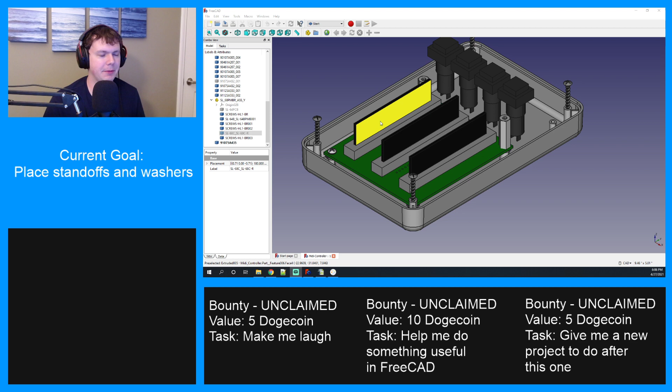All right, so last time we were designing all of this for a certain type of case, which as you can see here, let me pull up here. This is a good view. This is the case that I've just pulled in. Originally, oops, not that part. Where's the bottom? There it is. Originally, I was going to use this case, which was much shorter. And I was having a hard time making the buttons fit. Excuse me for a sec.

So we went online and looked at the company that I'm going to order these from, and they actually offered the same form factor. Let's see if I go here and zoom out, I can take this. Oops. Take that off, and then add this bottom piece in and take this one out. And you can see that nothing's really changed. So there's a case that already exists with the exact same form factor. It's just taller, which is good because it means that these buttons that we picked out can actually fit. You can see that they're actually quite a bit bigger than we had originally anticipated. But there's actually some space down here now. So I'm excited for that.

But what that does mean is we need to change the height of this PCB because these switches, which I have some here, have a set height. And we need to make sure that this plastic switch piece is obviously above the case so you can reach it. So we need to get the PCB at just the right height for that. And the way we're doing that is with washers and standoffs.

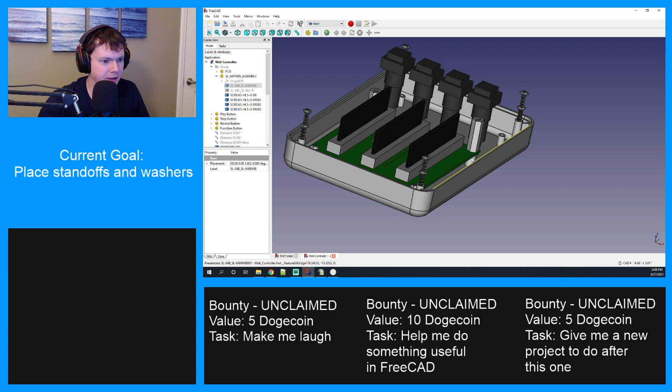So these standoffs here in the middle hold this side of the PCB in, and then on this side, and ignore the double stacked screws there. But if I turn the PCB off, yeah, okay, so you can see the washers here and then the screw where that mounting point is. So we need to make this taller because the case got taller. Which means redoing some measurements. So that's the first thing I'm going to get started on. And actually, I forgot to adjust that in our goal. So let me do that first.

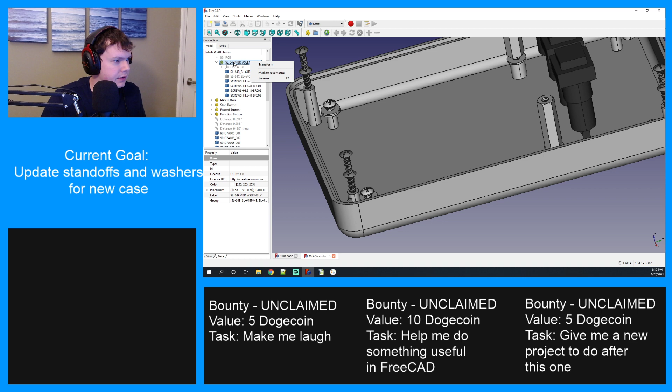So I think we are definitely going to go with this new case. So I don't see really any reason to keep the old one. The new one, let's see. Yeah, the bottom of the old one is in the same place as the new one. So I think this is fine to delete. So that'll delete a bunch of components. Yep, so that gets rid of our double screws and everything. But now we need to change our standoffs to match everything. And first things first, we got to figure out how high these switches need to be.

So if I grab this, here's the switch without the top on it. This height right here, you can see, is 15 millimeters. Sorry, I'm trying to block the mic when I do that. But yeah, this height right here is 15 millimeters. So we need to really get just the top piece, just a little bit above the case. The rest of it needs to be kind of hidden down inside. We want these switches to be low profile. However, we can't just go off that measurement because once the switch is on, that distance is actually a lot shorter. So I need to figure out what that is first.

So I'll measure it real quick. I guess I should measure in inches since everything else is done in inches. One of these days I'm going to find a way to buy only things from companies that are in metric, and that is going to be a good day. All right.

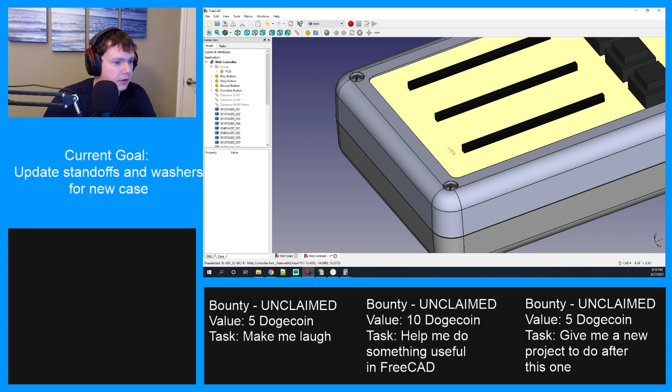All right, let's raise this. So we need to go up on the Z. Well, heck, let's just try 0. Already looking good. What does that put us at? There to there, 128 mils, and we said 194, right? Yep. So we subtract 128. 66. So we need to add 66 more. So 0.066. Okay. Let's delete this measurement.

All right, so this puts our PCB where it needs to be. Now you'll notice that it's sitting off of the standoffs a bit. So now we need to go take all of that into account. There is some math to be done here.

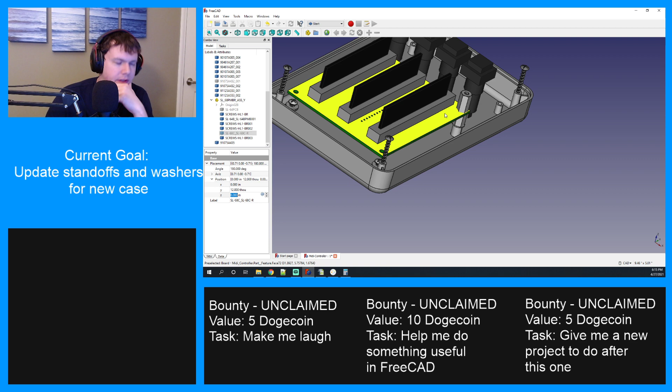Ooh. I apologize. I'm probably going to be coughing a lot tonight.

Okay. Let me go look up this new case that we've picked. Here's the website. By the way, these guys say that they can machine it and print it for you, so we might look into that option for this. Although I don't know how expensive it's going to be, or how long it'll take.

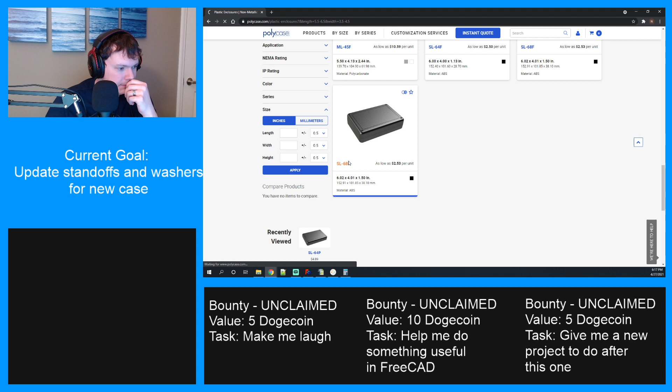Okay. It was SL something. I think I can do some filters. Length and width. 6, 4, apply. 6 by 4 by 1.5, I think this was it. Oh, you know what? It's probably marked in the part number here for the model. Yep, the 68P. Okay. So this one. And then I probably already have the drawing for it. Where is it? Oh, maybe not. Okay. We want this. Here we go.

All right, so this is the drawing that gives us the measurements on the inside. I'll move that out of the way. This will help us determine all these distances. Okay, so let's do this. First things first, I'm going to turn off that and turn the top of the case back on. And then I want to figure out these interior distances.

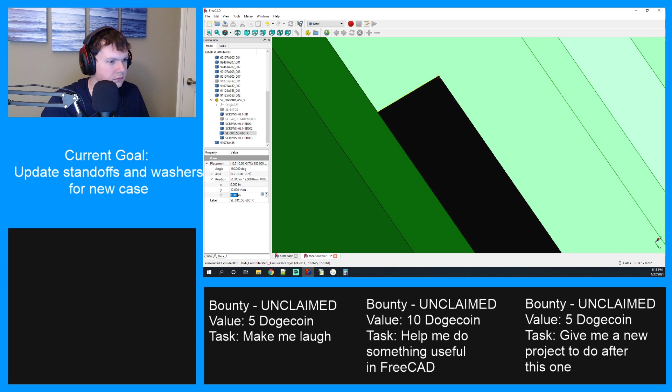I wonder if you can even do this. Oh, you can. That's cool. Oh, no. As soon as I move it, it doesn't work. All right, that's fine. I was just trying to figure out the inside distance to the bottom of the circuit board. We can do this from the drawing. We know that there's 194. Actually, let's double check that number. Yep, 0.194. Excellent. And then we need to add the thickness of this, and we take that away from the total length.

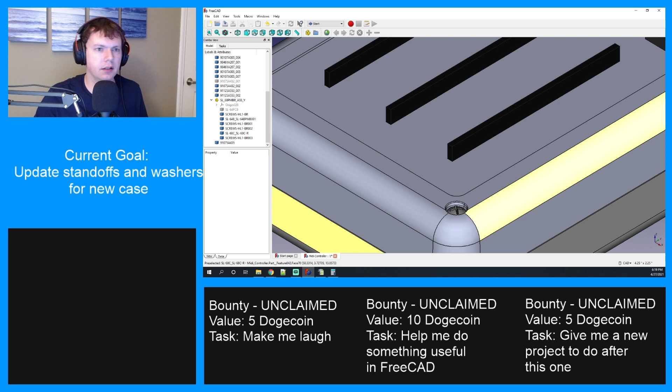All right. Let me pull the drawing up. The thickness of the top case, we want the recessed thickness. It's 0.110, but the recessed version is slightly different, 0.030. So in mils, 110 minus 30, 80. So it's 80 mils thick plus 194, so 274 mils. And then 15 millimeters was 591. Whoops, I just lost it all. Okay. 80 plus this, 274. Save that. And then 591 minus this value, 317 mils.

So take the top case off. 317 mils of this post is below the case. Now we need the thickness of this piece right here. Let me make sure this number is saved. Yep. From there to there, 0.254. So add that to the 317. 254 equals 571 mils, just over half an inch. So that is the distance from the top of the case down to the circuit board, which is what we're going to need for this standoff right here.

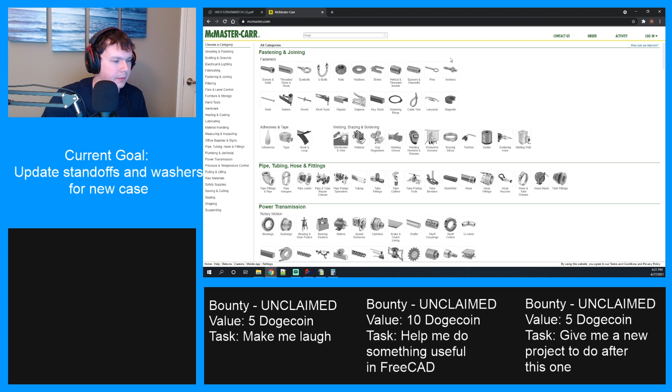What is this particular standoff? I've got McMaster up here. 9107, let me just pull in the other window. 5A435. Here it is. It is 7/8, so that's too big, we can't use that one. I guess we gotta find the closest. Everything on McMaster is done in fractional inches, so we need to find the one closest to 571 without going over. So it's going to be just over half an inch. We're using 4-40s.

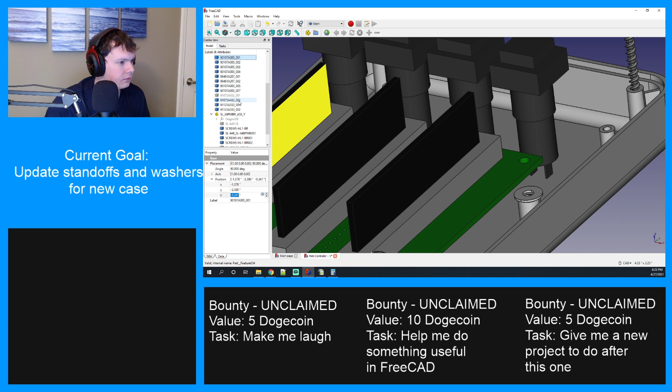9107, 5A103. There's no chance we've already included that, have we? Nope. Okay. All right, I'm going to delete this. And then we need to delete our other top standoffs probably. Yep, that one. Let's delete that and delete that. Just got to get rid of everything we don't need. Okay.

All right, and then this is the one that I'm tentatively using here. Actually, wait. 3/16 hex size. Can we go to a 1/4 inch hex size? Does that give us more options? Half inch, 5/8. No, it still gives us the same. Let's use the 1/4 inch size. I like that better. So this one.

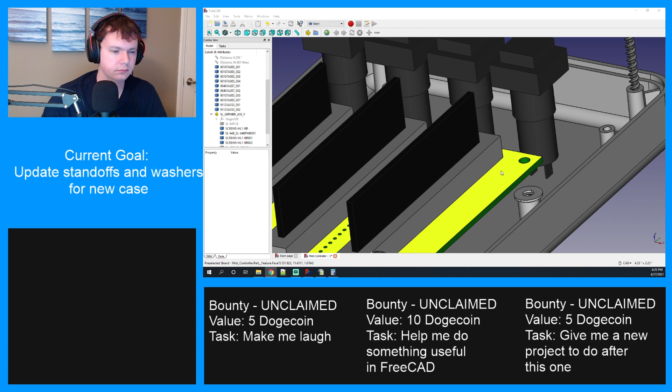Alright, so if I go back to this, I believe these are the 1/4 inch ones as well. Alright, doesn't look like we've used that, so I'm going to go ahead and download the CAD model. And then we need to import that. Alright, that ended up somewhere. Let's rename this. And then we need to duplicate it, because we need 2 of them. Okay. Now where is it? There it is.

So, alright, you know what? Actually, let's just start with this one because we're going to have to adjust some things. Axis, we need it on the Y. 0. Angle 90. Okay, that's a good start. You can see it's standing upright. Alright, now let's see, where is this part at, position-wise? 1.378 and 0.740. 1.378 and 0.740. There it is. Alright, so now we need to get it up high enough.

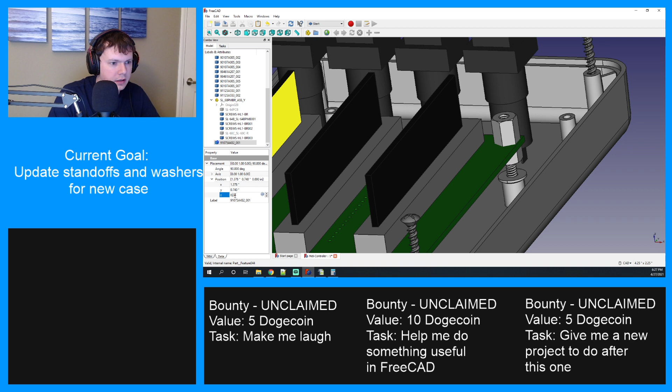Alright, Z-axis. Too high. 3, 2, 5. Alright, we're in the right vicinity. Let me get... There we go. We're gonna need this to be pretty close. There we go. 0.225. That's probably pretty close. Alright, so now we need to duplicate that. And then this one, the x-axis becomes negative. If we go back here, we can see that it's appeared over here. Right there. So now we got both of them. All right, excellent.

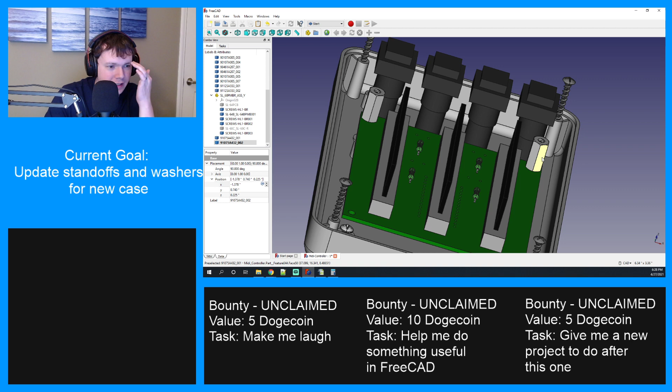You know what? Actually, this might be wrong. We decided that... excuse me. We had to use a smaller size. We used a 1/2 inch and it's 0.571. How thick are these washers? They're not super thick. I think we put a washer on here. Because we've left like 70 mils of space, which isn't a lot, but it could like clunk around. Yeah, they're 20. All right.

What is this part? 90107 A005. Actually, I probably have this in the BOM. Yep. Thickness can vary from 0.024 to 0.038. If it's 0.038, 2 of them is too much. But 0.024, 2 of them would be enough. Let's just start with 1. We can always add another if it becomes necessary. But yeah, I think this needs a washer on it. Unfortunately. So this gets raised by 0.024. So it becomes 0.249. 0.25, we'll round it out even, make sure everything fits.

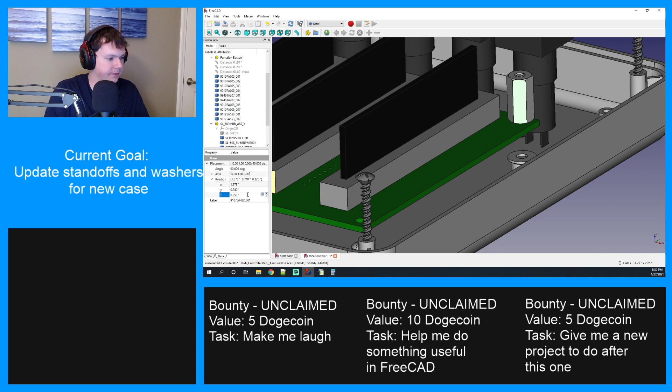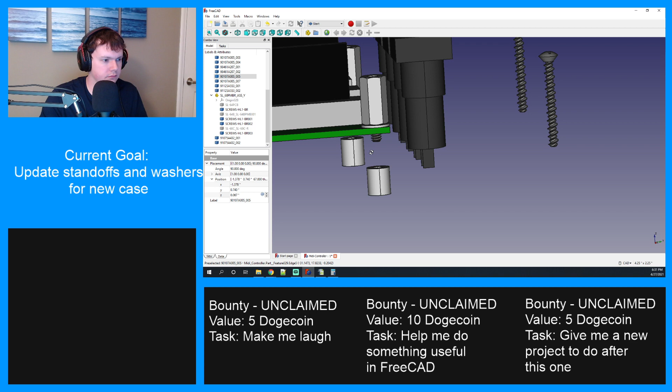This one too. All right. And then these washers need to go up to meet that. Let me get rid of the bottom case here, turn it off for this. Like that. 0 is right there. 105, 67, pretty close. There we go. That's the right height. All right, and we need to do that with the other one. .067. All right, excellent. We're getting there, kind of. Yeah, all right, so that works.

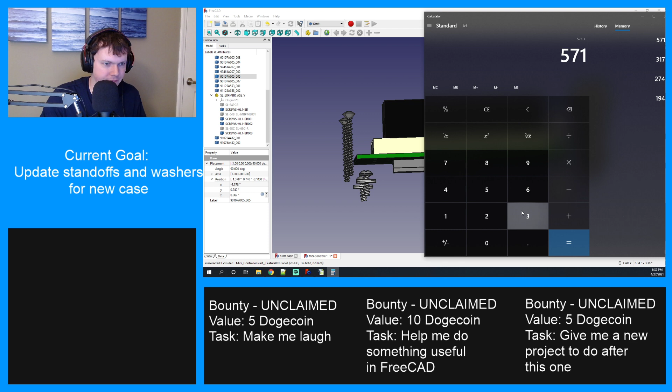Let me update the assembly with it. Whoops. Here we go. The middle top standoff becomes this new one. All right. Now we gotta do this one, the middle bottom. So we should be able to figure out the spacing required based off of this number. So we know 571 mils between the top of the case and the top of the PCB. The PCB is 62 mils thick. So we can add that. 633. So that's from the top of the case to the bottom of the PCB.

Now, if we pull up this drawing in particular, we should be able to see how thick the interior is. 1.286. Well, actually, probably need 1286 minus this number. Gives us 653. 653 is the distance from the bottom of the case to the bottom of the PCB. Or roughly 5/8, I believe. 5 divided by 8. 0.625, 653. Yeah, that's pretty close. We can actually do that without a washer. Okay. So we are going to pick a threaded standoff that is 0.625 or 5/8 long.

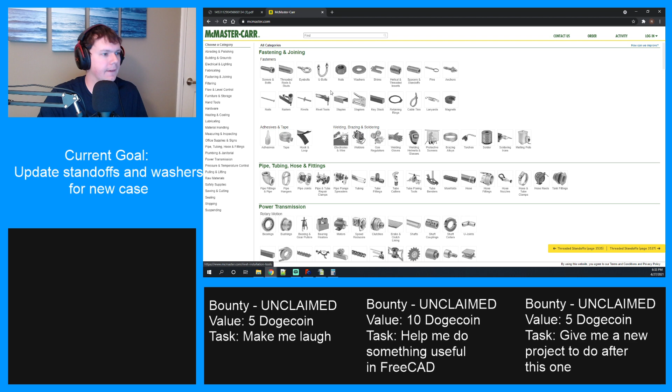So here we go. Let's go back to the home page here. And then spacers and standoffs. Round threaded standoffs. We want fully threaded, 5/8, probably a 1/4 inch in the outer diameter, and it needs to be 4-40. Oh, they have 9/16 as an option. Here we go. This one right here. $2.14 each. Jeez, these things are expensive.

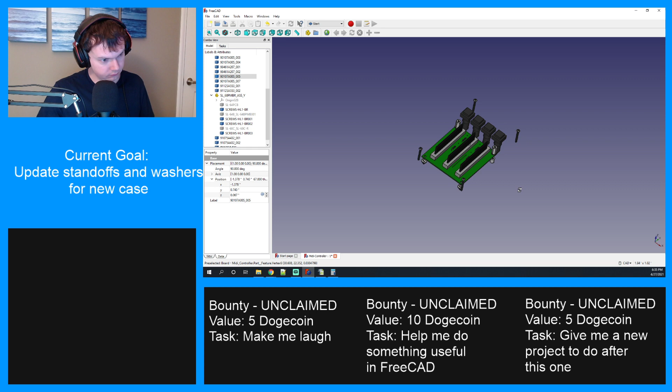All right, 5/8 long, fully threaded, 1/4 inch all the way around the outside. Inside is a 4-40 thread, so it'll tighten in just fine. All right, excellent. So let's add this to our model. Download this step file. And then we'll have to get rid of these ones. There he is. Hidden underneath there.

So 1.378, 0.74. There we go. And now we need to lower it down into the right height. So really, just until it's against the bottom of the PCB. Does anyone have any questions so far?

All right, I'm going to rename this real quick too. And then this one needs to get turned off. This one too. Okay. Oops. Negative 0. That's pretty close. Negative 0.32.

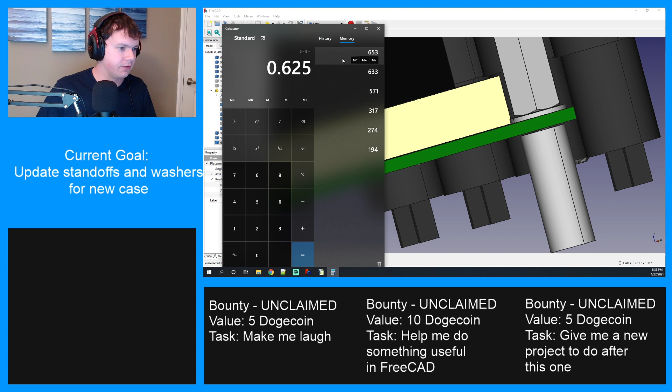I guess we could have worked that out because we could figure out the halfway distance of that total. If it's 653, you do this divided by 2, because these are set off the midpoint, so 326.5, that would be halfway between the board and the bottom, but 32 is fine. All right, let's duplicate that and do that on the other side. Change this one to negative.

And then we can delete these ones that we don't need anymore. And then finally we need to add this to our parts list in place of the existing one. There we go. Washers are good. So the last one is these standoff screws, and we'll probably have to add more standoffs. Well, we're going to end up buying a lot of stuff for this. It's going to get expensive.

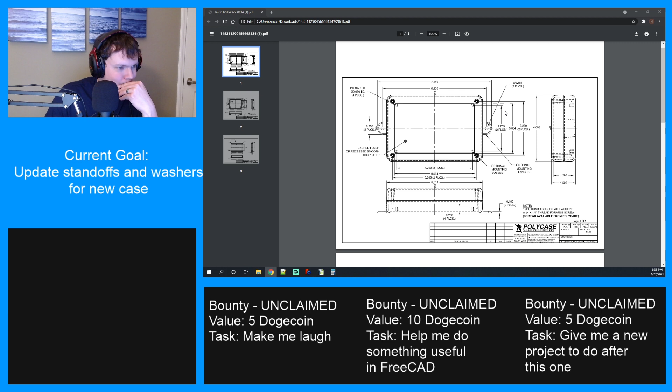Okay. So these screws got to change because they're not going to be long enough. And then we need something in between here. We might be able to get rid of these washers, or more likely just have to move them. We got to get the distance from the bottom of the PCB to the standoff. That'll be a good start. So how tall are the mounting points? 0.25 inches. So distance from the bottom of the PCB to the bottom of the case.

Minus 250. Gives us 403. What is the closest fraction to that? Let's start with the standoff. So 0.403. For this one, I'm not going to use a threaded standoff. Let's back up here. Instead of a standoff, we're going to use what's called a spacer. The only difference being spacers are not threaded.

Aluminum unthreaded spacers. These are pretty cheap. All right. We want 1/4 inch diameter for number 4 screw. That inner diameter is a little too small. Maybe a number 6. Yeah, probably number 6.

And then what's the closest fraction to 0.4? What's 5/16? This is where I need a chart. Maybe there is one. I can just Google real quick. Fractions to mils. I just want a table. Here we go. I don't know if I can show this on screen because copyright stuff. So we need as close to 403 as we can get without going over.

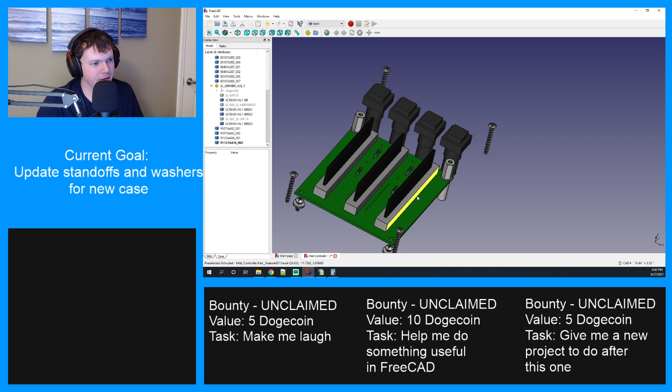So do we risk the bigger standoff, or do we risk going with a machine screw? The problem with a machine screw is sometimes in plastic, especially because they don't cut very well, they can get kind of jammed in there, and I've actually had them snap before, depending on which one you use, when you're trying to pull them out. If we make this really tight, it should be fine. Yeah. Any thoughts on that? Anybody?

Let me look at machine screw. Just give me a standard. 4-40. I guess we just pick any of these. Yeah, 0.112. It's much thinner. What's the diameter of the hole on this case? Because that'll matter too. Interior diameter is 0.090. Okay.

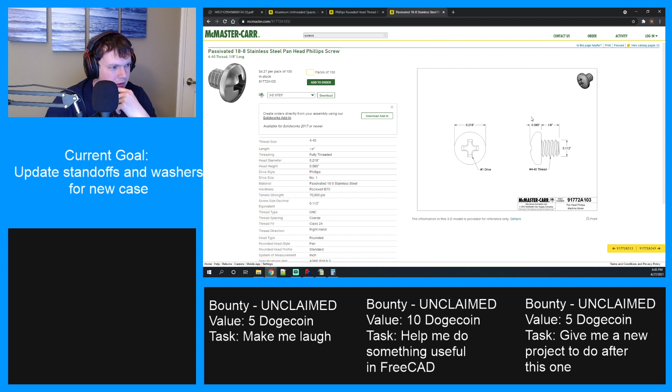And the screw would probably go in just fine, but I don't know. Maybe this is the right option. Maybe we go with a 4-40 and go with that. I think we do. I think that's the safer bet. All right, let's do that then. I'm not hearing anything otherwise, so. All right.

So it's like 1/4 inch diameter, number 4. What size were we looking at? I forgot already. 3/8. That's right. 3/8 number 4 for this one. All right, we'll download this one. And then we need to add that in here. And I think we're going to have to have one washer as well. All right, it's hidden in here somewhere. Yep, there it is. So 0.378 negative 2.380.

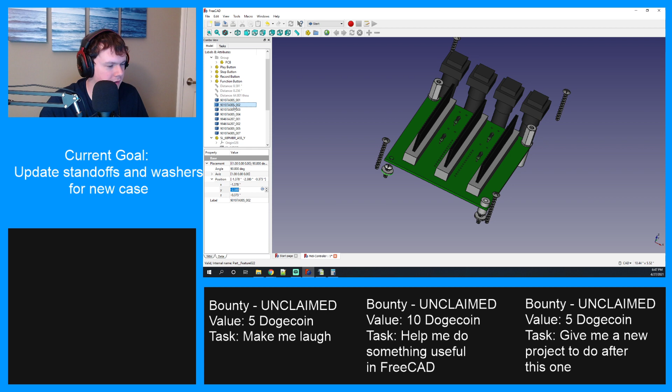All right, what was the screw again? Negative 2.38. And then we will adjust this. All right, excellent. And then I am going to turn off a lot of this stuff so I can line this up. There we go. And we need to adjust the height. We could probably figure out the distance, honestly. That's all right, though. Just go for it. It's more fun that way. Oops. 1. That's probably close enough. 0.19.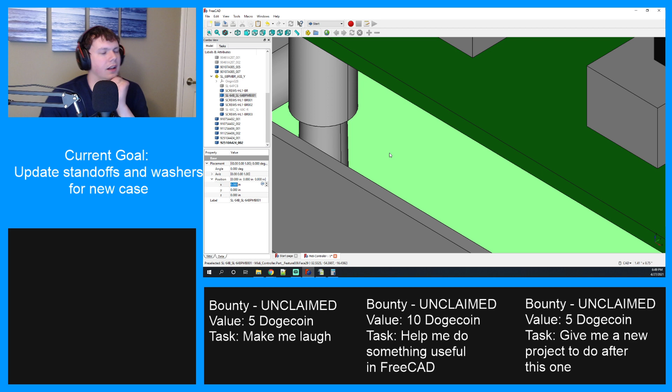All right. And then we will duplicate that. And we need to change the X to negative. Ah, we're getting so close, man. All right. So that should be fine. And then if we pull in the bottom case, I think that's that. Yep. Did we get that right? It looks like it. Question is, how much space is there in here? There's going to be some at least. But I can't see it very well. I don't know how to do that. I need to do some sort of cross-section view or something.

Okay. Oh, yeah, you can see quite a bit of space in there. Yep. I think we'll be okay to add a washer. I think we should. Right on the bottom of this. So, all right, let me turn this off. And let's see, let's lower this by 0.024. So negative 214. And then we should be able to raise the washer to be right in that space there.

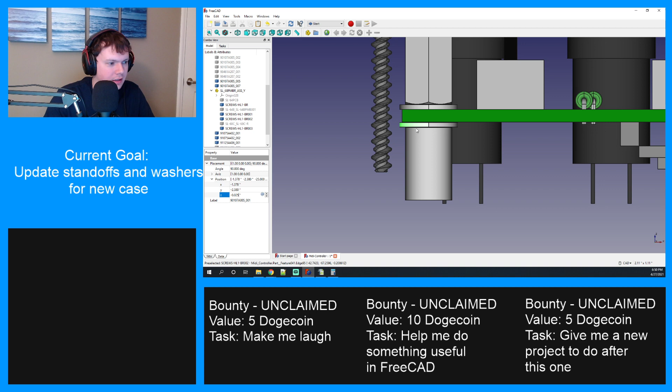Turn this one off. There we go. Oh. All right. It's going to be a very small amount of movement. Yeah, right there. 0.025. Fits in that space perfectly. All right. I don't think we'll need another washer. Let me turn on this again. And then, yeah, I think it's okay, but I think we're good. All right, so now I need to do that to the other side.

Let's see, where do I want to bring this washer from? Yeah, I'm gonna delete these two. And then change this one to a positive X. I guess I could turn it on to see what is actually happening. All right, and then minus 0.025, so we'll adjust that to the same here. Okay. Excellent. And then I need to make sure we update.

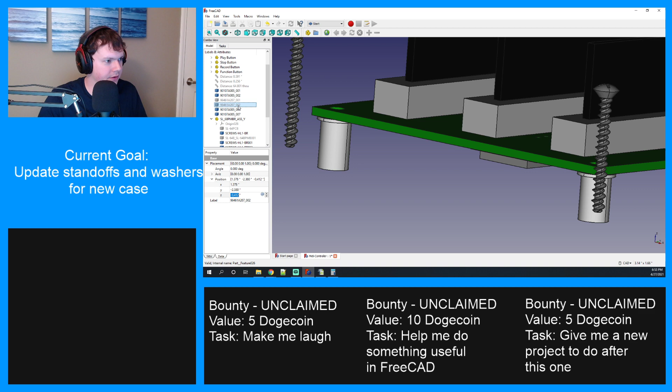So that's almost everything. The last thing I think is the screws, right? Yep. And so we need different screws, ones that will actually go down into the case. Let's see if our case drawing here tells us how far down that hole goes. It's probably the whole 0.25, honestly. But I don't think it tells me.

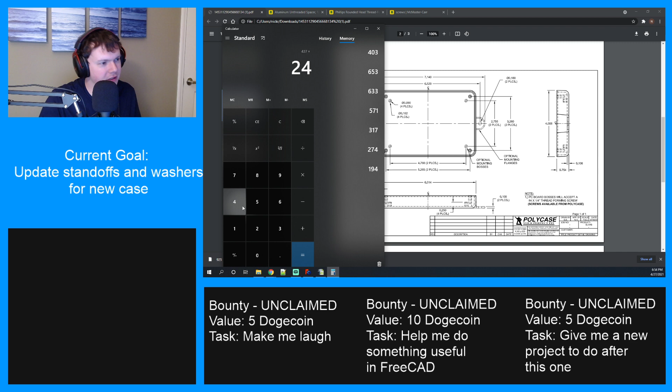All right, well, we'll have to figure that out then. So, good screw size. Let's see. Store that number just in case I need it. So we need mils. We need 62 for the thickness of the board, plus 3/8, which is 375, plus the thickness of the washer, which is at least 24. So we need something that's at least that, the 461. Plus a little extra to actually get to.

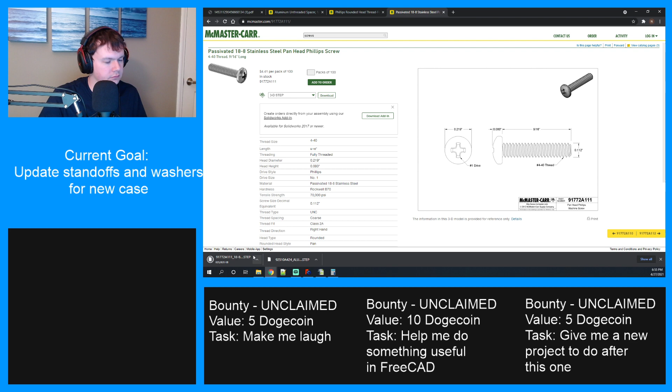What's the next size up from half-inch? 9/16. Oh, that's not 4-40. Yep, 9/16. What is 9/16 in mils? .5625. That's probably better. We should probably do that. Let's go with a 9/16. All right, so this will be good. We can just do something. What is this? Oh, that's that standoff back there. That's probably fine to leave on now.

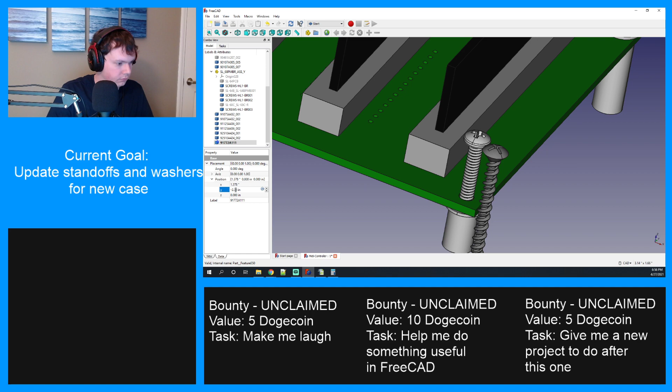I'm gonna delete these extra distances. All right, we need to import that. Where is it? There it is. Oh, it's already in the right orientation. Look at that. All right, 1.378, negative 2.38. Okay, there it is lined up. Clearance looks good. It's good on this side as well. Yep, it's really close, but it's right where it needs to be. Oh yeah, because that's the hole anyway, so. All right.

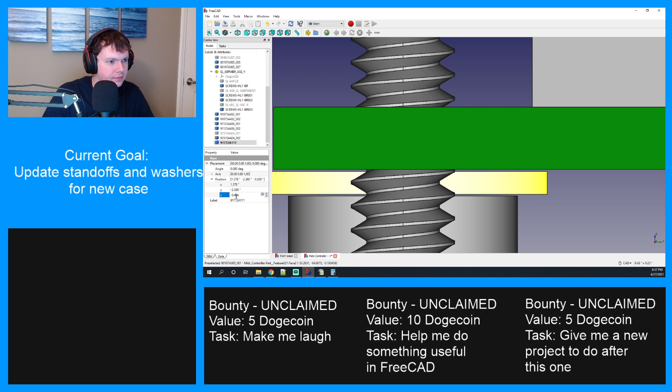Actually, this one is probably the best view. And then we need to move this down. Wow, honestly, that half inch was pretty dang close. Let's go for 7, 8, 9, 5. Yeah, negative 495. Okay. So then we should be able to see. Sorry. If I turn these back on.

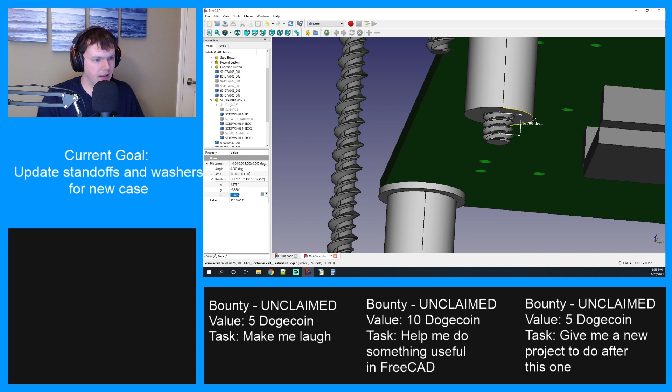Does the height of that seem weird to you? Anyone? It's like there's no clearance for the washer on that one. Where's the washer? Oh yeah, there is no clearance. These are different heights. 214, yep. 4. Okay. Let's see what kind of height we have on this. From here to here, 75 thousandths. We honestly could go a little bit bigger on the screw. That should be enough to grip into the plastic, but it may not be very much. I think we'll be okay though.

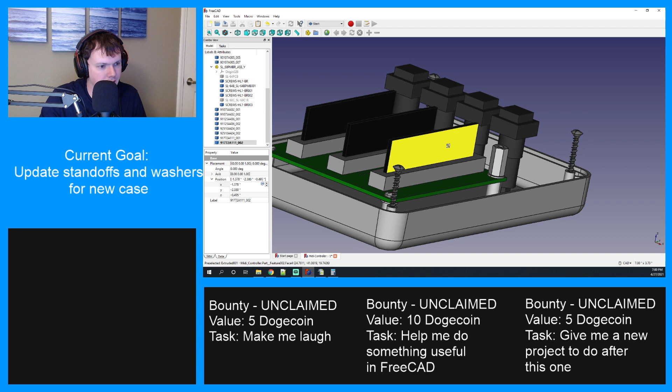Yeah, hard to see. All right, so we need to edit this. And then we need to duplicate the screw to the other side. And then I think we'll have all of our standoffs and screws done. There it is. All right, so look at that. The whole assembly, minus the top shell, obviously, is all there. Whew. All right, well, that's cool. So we have a solution for all of that, really. And what we'll do is we'll put some adhesive pads on the top and bottom of these standoffs, and that'll kind of squeeze everything into place. And I think that'll be good. All right, cool. So that's looking really good.

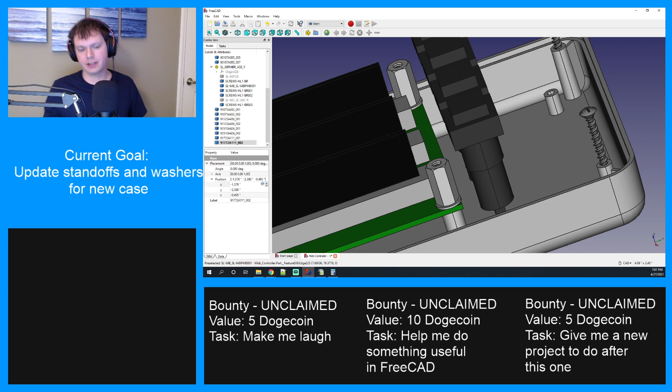So now we need to do... Actually, first we need to add these screws to our materials list. Here. All right, let's do those ones. Slider knobs, label and stickers, or feet, buttons. All right, this one, the cable. This is the next thing we need to model. And it is kind of annoying. So part of the other problem we're dealing with is we have to fit a cable in here, a cable mount, and it's a pretty big one, so I'm a little unsure of how exactly we're going to do that. All right, so this is the one I was looking at using because it's not too expensive, and it switches it from a USB-C to a USB micro, which was requested.

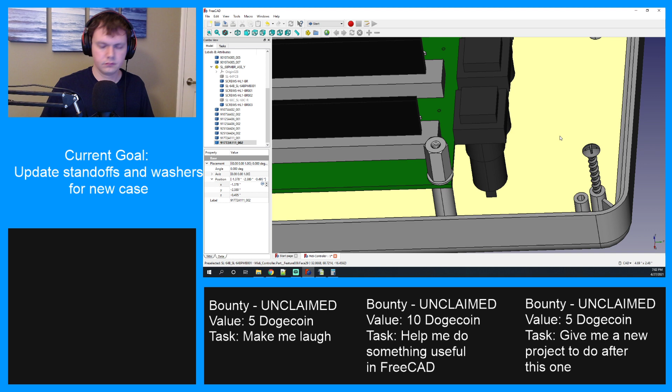All right, here we go. So the downside being how long it was. This is in millimeters. 40.5 millimeters. Which, that's a lot. 40.5 millimeters to inches. What is that? 1.59 inches. So over an inch and a half. And from here to here, that's not that long. This is not even going to be close to correct, but as a rough estimate, 1.665. Okay, so unfortunately, that's a heavy angle. Yeah, so that's not really a useful measurement at all. So if we go from like here to here, yeah, 1.407. So it's already obvious that it's going to be too big.

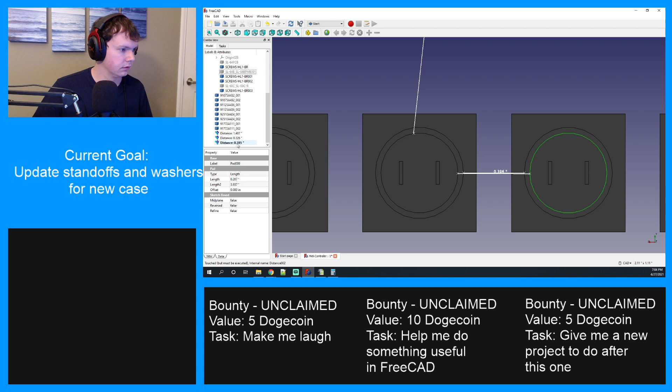And unfortunately, the gap between these buttons is not big enough. Let's see, from here to here, 0.326. From here to here, 0.385. The 0.385 is probably what we'd work with. This is 13 millimeters thick, which I think is close to half an inch. So that doesn't quite work. Yeah, 0.5 inches.

Although, it does get thinner right at the end here. Down to maybe like 9. What's that? 0.35, 0.38. That could slide in there. It's going to be dang close, but it might actually fit now that I'm thinking about it. It depends on how long this section is. If there was a model for this, that would be awesome, but I don't think there is. It is an Adafruit thing, though, I think. Yep. 4056.

Yeah, they don't have any kind of model.

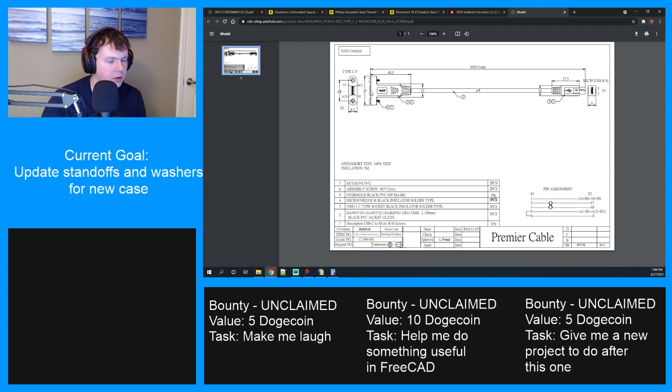Okay. Does their drawing show that this piece sticks out? It does, but it doesn't tell you how much. It shows that the USB-C port sticks out a bit, which is something we need because we're cutting through the edge of that case, but I don't know how far it sticks out. Right. Well, I think we model it and try it and see what happens, and go from there.

All right, so I think we got to update our goal here for this one. Oops. Model the USB-C port. Okay. I probably should center that a little bit. There we go.

No one's attempted to claim a bounty tonight. I'm kind of surprised.

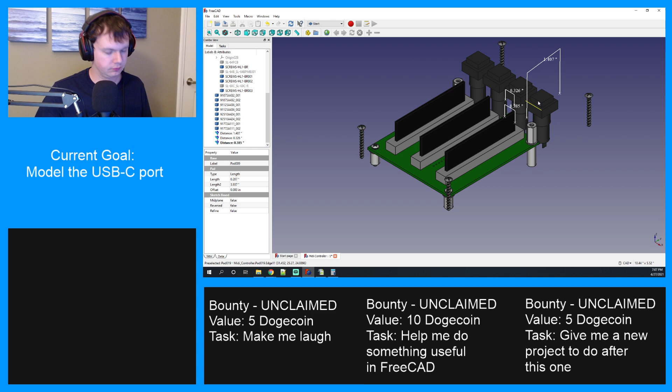All right. Oops. All right, let's model this part and go from there. I think I'm just going to model it kind of looking down. So let me turn a lot of this off. Create a new sketch. I think we want XY. Okay, yep, want it down here, and then I want this off. That's an odd origin. I thought the origin was supposed to be in the middle for most of this stuff. All right, well, we'll go off the origin.

I think I need to change our units here. Edit. Preferences. Units. Apply. Okay. And then I'm going to turn off these screws. Just turn all this off, honestly. Okay.

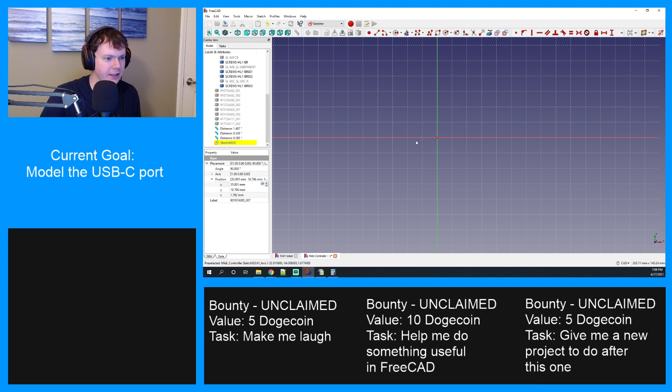So I'm going off this drawing right here. So we need to go off the end of this. We know it's 28 millimeters wide and 8.5 millimeters thick. So we're just going to make a square like this. We're not going to make a perfect model, just a rudimentary one to kind of get us started. So let's do a rectangle. And then we'll start adding in constraints. All right, so this needs to be 28 millimeters. And this one needs to be 8.5.

And then a vertical constraint from, it already has a horizontal constraint. Shoot. How do I do this again? Nope. From here. Nope. How do I constrain it? I need to center it, basically.

How's everybody's Tuesday going? Anything to report?

I need a constraint between a point and a line. I thought there was an item for that. That's not it. Oh, I did this last time, and I can't remember how to do it.

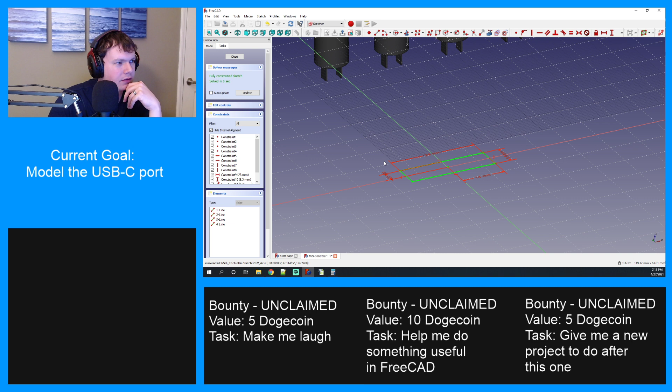Line drawing inspection. It's not draft. I don't think so. No, that's definitely not it. All right, go back to the sketcher. Sketch. I've done that. I need to retain information better. 3D view or model view? I don't remember which one of these benches it is, though.

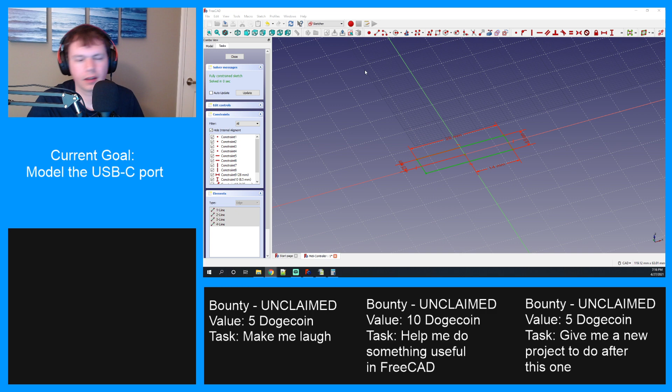Oh, okay, so hold on. Go here, select the sketch in the tree view, and then pad in the part design. Here we go. There it is, this one. It's not highlighted though. I may not have done this the right way. I might have to delete this sketch and try again, because I might have done it in the wrong thing.

Delete, please. I want to delete it. There, I'll just get rid of it completely. Oh, you know what? I probably didn't have that closed the whole time, which might be why that didn't work. Hold on. I'll redo everything. Hit close. And now if I go to part design. Ah, now we can. I didn't have the sketch closed. Okay, interesting.

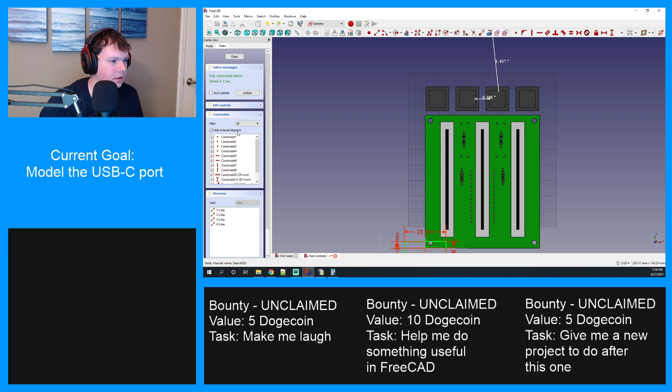Alright, so part design. Is this what I wanted? Hold on, something's still not working right. "In order to use part design, you must need an active body object in the document. Please make one active or create one. If you have a legacy document part of the body, use the transfer function into a body." Okay. This is really what I get for not paying attention.

Okay. Create new part and make it active. So we need a body. And then for this body, we're going to add the sketch in here. And extrude that. There we go. Aha. Okay, we got there in the end. Now I can go back to my drawing.

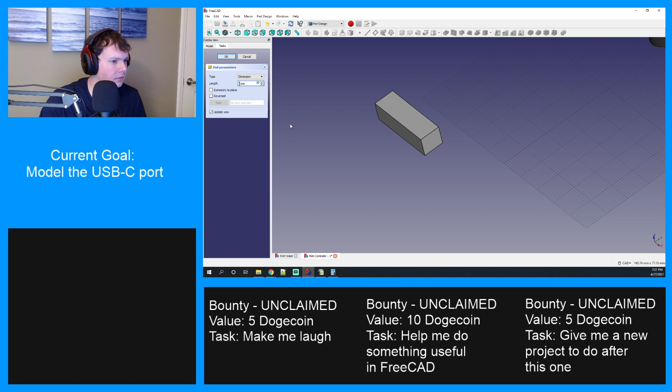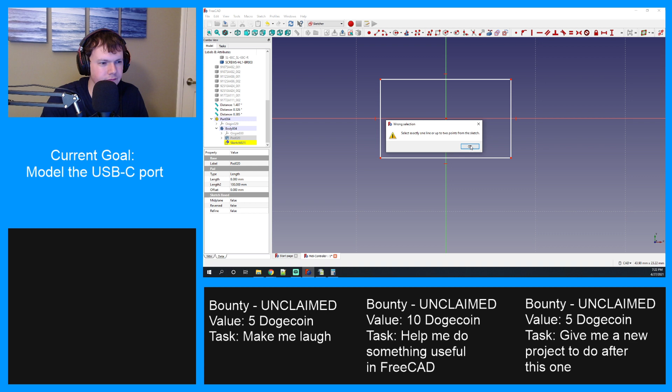So we're going to have to do another one of these. And then let me turn this off for the second. And then we'll start constraining things. I know. I'm done drawing. Stop making me draw things. There we go. It's kind of weird how some of this acts sometimes. All right, this is 8.5. And then this one is 13. All right, cool. Then we can space these out a little bit, and then we need to draw some distance here, from here to here. So 4.25, then from here to here, 6.5.

Don't do crap like that, you're getting banned. As soon as I figure out how. All right. Blocked. Supposedly. There we go. That's better. All right. You always got to wonder about the bots.

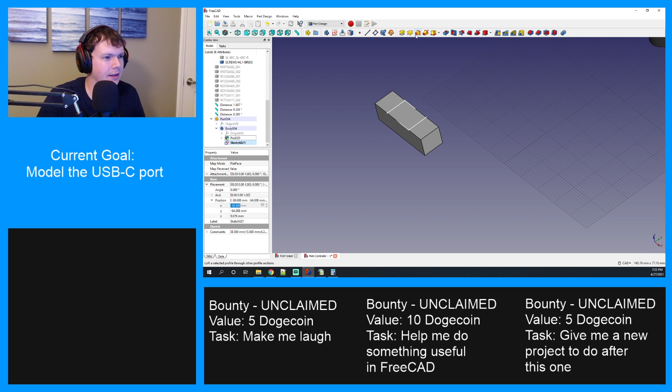All right, so this is done. So we can close this. And then put that up. And then I guess we got to figure out how high we want that to go. It's not the whole 40.5. I guess that would be minus 8. We should keep track of this. 40.5 minus 8 equals 32.5. So that's our remaining space, but it actually does get a little smaller.

So if we're looking here at this little section right here with the stress reliever, it gets a little thinner, so we need to figure out what this total distance is. It's going to be a rough guess. I'm saying this is probably 10 millimeters, so 32.5 minus 10, 22.5. And that should be close enough for us. All right, so 22.5. Okay. And then one more sketch right on top here.

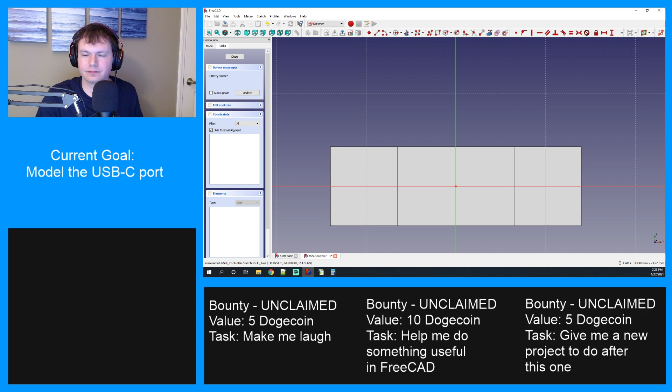And we're going to have to guess again on the dimensions here. This is why everything that they sell on these sites should have a model. Every single one. All right, same height again. So another rectangle. Whoops. No, go back. There we go. And then let's turn off this. Okay. Same thing as before. So this is still 8.5. And then this one we have to totally guess on. Maybe 9? I think it's the number we worked with last time.

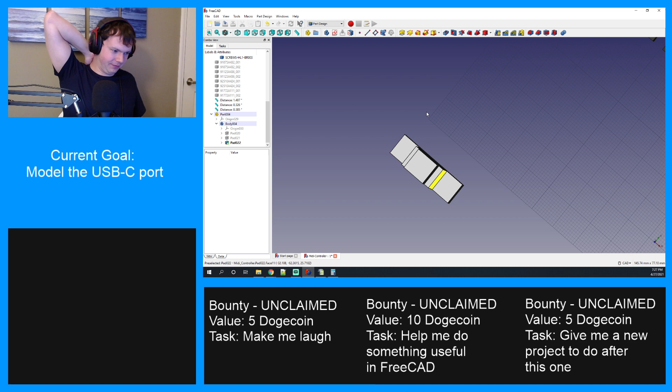Excuse me. And then 4.25. And this one would be half of 9, 4.5. There we go. All right, everything's locked into place. Model's turned green. Okay, let me close this. And then raise this up. And I think we decided this is going to be 10. Yep. Okay. So this is our absolute basic model for this, what is the word? USB-C port. I think there's still some stuff we probably should add, the ports though, honestly.

So on this face right here, we need a sketch. And we need to cut. So we'll do one circle at a time. It's going to be 10 millimeters from the center. And then the height, or the radius, we need to do a radius. The radius is... It's an M3 screw. Let's go on McMaster and just look what a number 3 screw... .099 inches. 1.5. Hold on, just checking a couple things.

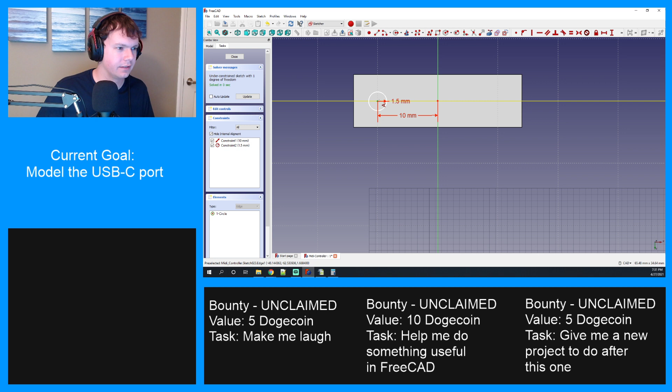We've set the distance from that, but I guess we do need to say an angle. How do you do that? Is there an angle? Is the angle of a line or angle of two lines? Over constrained. Let's delete this one.

How do you delete it? Whoops, didn't mean to do that. No, go back to that. There we go. I guess Control Z was the only way. All right. We know that it's more or less pretty close to the right spot. But I feel like it really does need to be constrained somehow. I don't know how to constrain this.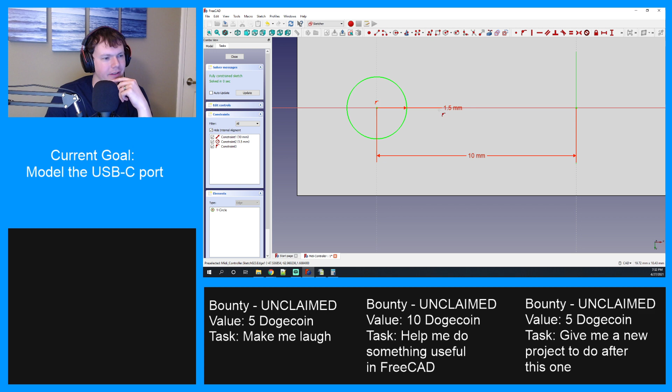I guess I can move it up here and then do a vertical one. No, that wouldn't work. Ah, there we go. You can constrain it to the axis that way. Perfect. Okay, that looks good. So now we can close that and then pad sketch.

I don't know that we want to do a pad. We want to cut somehow into this. Oh, if you do a negative value, actually, it might. Nope, it doesn't. Oh, hold on. No, negative values don't work. FreeCAD, pad, sketch, cut. All right, we'll get there eventually.

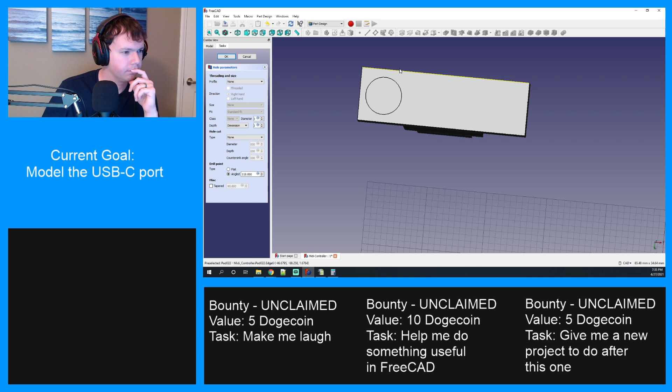There might be an option here. Oh, create a hole with the selected sketch. Why did it suddenly get way bigger? That was not what I wanted. Nope. Oh, there we go. Pocket. Length, I don't know, 10. We want to go all the way through. Okay. Done. Okay, we got there. First screw hole finished. Now we gotta do the other one.

Just gotta create an identical circle on this side. All right. Oops, no, this one. All right, and then we need a distance from the origin point here to here. Excuse me. And then we need the angle. Oh, we can do this. That's right. Constrain that to that line. Yep, there we go. Okay, let's close that. And then cut a pocket with that sketch. Do 10 millimeters.

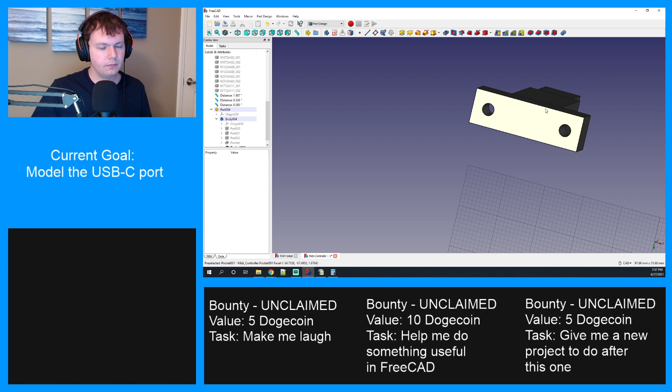There we go. All right, I think we're pretty much there. Don't know if we necessarily need to do the USB-C port yet, but we can always add it later as well. Let's just start with this, because this will get us in the right spot and let us know if this is going to be possible. All right. I need the bottom shell. All right, excellent. Let me get into the start view. How do I hide this grid? I remember that being a thing I dealt with last time. Not sure.

Excuse me. All right, so we do need to rotate this part on the x-axis. Okay, and then 90. There we go. Wow, it rotated way around the x-axis. Where the heck is the... I tried to draw this so the origin was in the middle of it, but I guess that didn't work out that way, huh? That sucks. All right, that's all right. We can eyeball it. Actually, let's change our units back to inches, as much as I hate to do that. Get back to the unit that we were using. Okay.

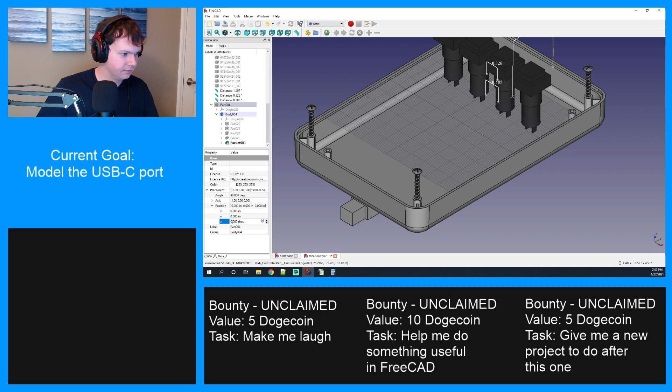Is it negative now? Is the part upside down? Oh, it's in thousandths. What the heck? I'm so confused what's going on right now. What? Why is the Z not up? The body is relative to the part, so this should still be 0. We just want the part to move. Okay, there we go. Now we're back to inches.

So if I... 1... Where does it go? There it is. So the orientations still don't make sense. Okay, yeah it does. It was just weird how it was doing it. Okay. Whoops. Alright, I gotta turn the buttons off while I work this out and get these distances gone. Weird stuff. Okay.

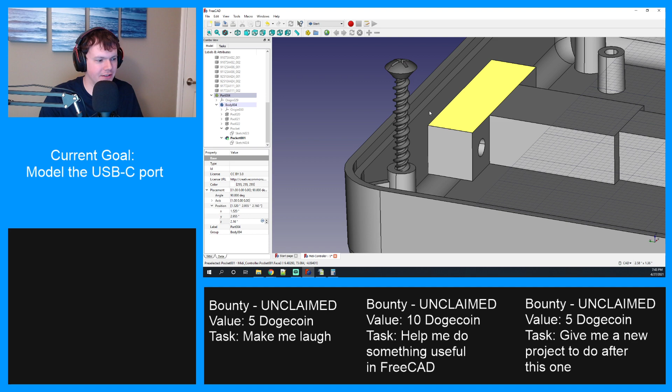Alright, so if I look in here, there's a slight gap. It's really hard to see, but it is there. And we are above the point where it starts that curve right there. So I think it works. That's basically as good as it is possibly going to get. Now we need to see if it interferes with the buttons. So I'm going to turn off the assembly and then put the buttons back in.

Just barely does it squeeze through. Look at that. Wow. Alright, well, I think that's proof that we can use this part. And it might actually, in all honesty, when we actually do this, put a little pressure on it. But I think we can get away with a little bit.

This is what I get for making everything to such tight tolerances. This is what happens when you can't use custom components. When you have to use off-the-shelf stuff, you kind of have to cobble things together as best as you can, and there's only a certain way that everything will really fit. That's why even for pretty small product runs, most people will still do custom enclosures, because it gives you so much more flexibility and it makes the product look so much better and be so much more marketable.

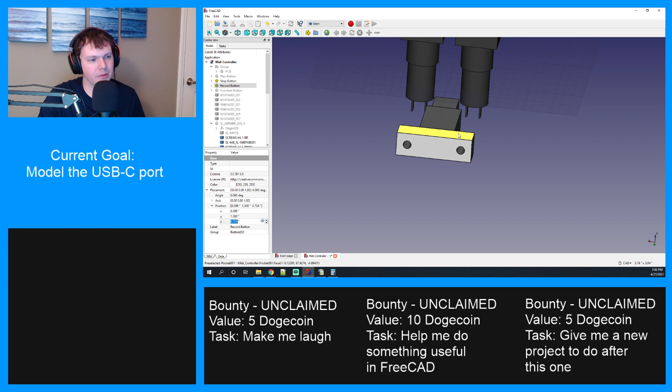All right, so the next step is I got to cut holes on the shell where everything is going to be. So yeah. So we got to figure out how to do that, which honestly is pretty straightforward. It's more about positioning than anything. There we go. And I'll turn this back on. Oh, we're getting so close. And this will time right, because then it'll be next month and I'll have money to buy the stuff when it's time.

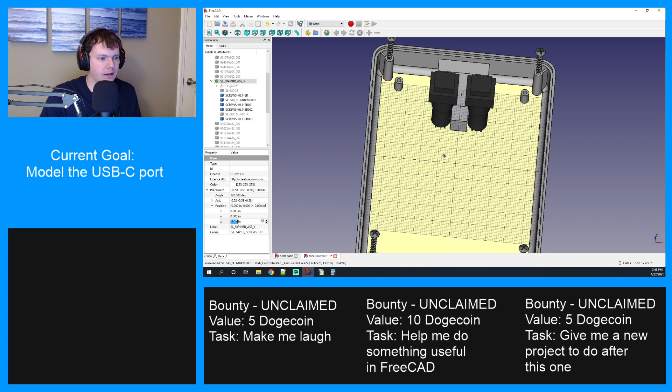Sheesh. Really tight fit. Alright. I think I'm going to do that next time. Do all of the holes in the enclosure, because now that we got everything kind of in place, that makes this next part a little easier. Let me go through and double check that there's no extra parts. Turn the PCB off for this one. Washer, washer. Is that screw, screw? Okay, those don't need to be there.

Washer, washer. Standoff top, standoff top, standoff bottom, standoff bottom. Standoff there, standoff there. What is this? Screw, screw. All right, and then I think this is the one I wanted. Yep. I want to see real quick the screws that I'm using, if they're big enough. Specifically, these screws. All right. Turn off the... Yeah, all right. That looks good.

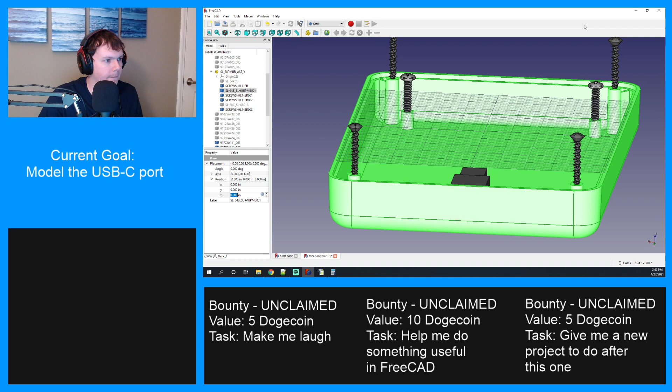All right, FreeCAD, turn off. How can I hide the grid? I'm trying to figure out how to turn the grid off so I can have a nice final shot of the whole assembly. Edit, preferences, draft grid, edit. Draft. That's not it. Dang it. How do I hide this grid? More importantly, why is it still there?

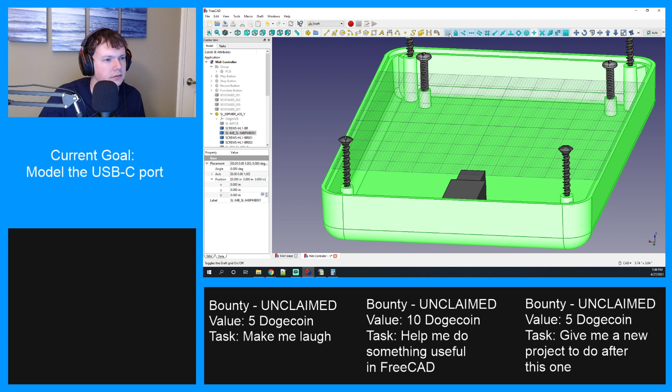Oh, set, unset, working plane. There it goes. Okay. That took me a second. All right, let's go back to the start. Oh, workbench. Start. There we go. All right. Let's get everything in now. This, and this. Okay, that is everything except the top shell. And then we can add that in as necessary to see the full thing.

But there we go. This is our whole assembly on the inside. So we've placed a bunch of parts around, but I think we got there. And then I need to double check that I got these screws added. Standoff screws. Make sure these are the right ones. Yep, 9/16. Okay, yep. Yep. Okay.

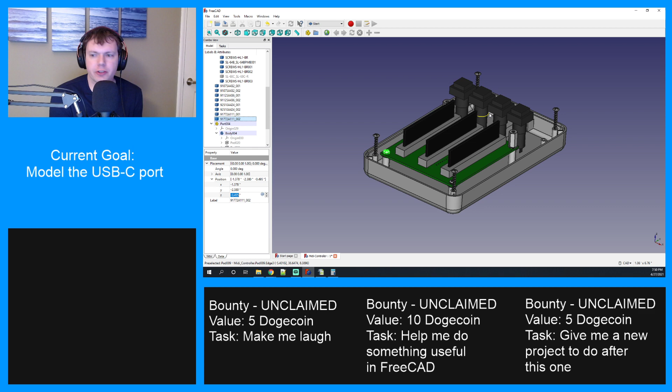So next time we'll add the holes on the casing, and then we'll be good to start getting quotes. The PCB shouldn't be that expensive, but we'll need to get quotes from the company that sells the cases, see if they'll be willing to cut 2 of them for us. They will custom cut and print them, but typically when they do that, they're kind of expecting, you know, an order of like 1,000 or 10,000 or something. We'll see if they'll be willing to do 2 for us.

And then if so, and it's not too expensive, we'll just have them cut all the holes. If not, then I'm going to have to do it manually. And I'm not sure how I'm going to do that yet. It probably involves a Dremel and a cutting wheel and some drills, but we'll figure that out when the time comes. So, yeah. I think that is it then.